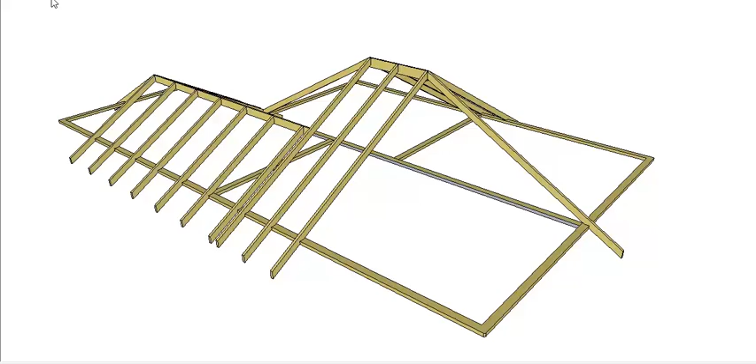So first step for the hip when we're scribing, grab the hip material. On this end I want to cut my plumb cut hip and my edge bevel hip. I'm going to cut them before I do anything else. Then I'm going to go back to my roof and work out what the stand-up height of our rafters is. That's the height that's left from the back of the top of the bird's mouth plumb up to the top of the rafter.

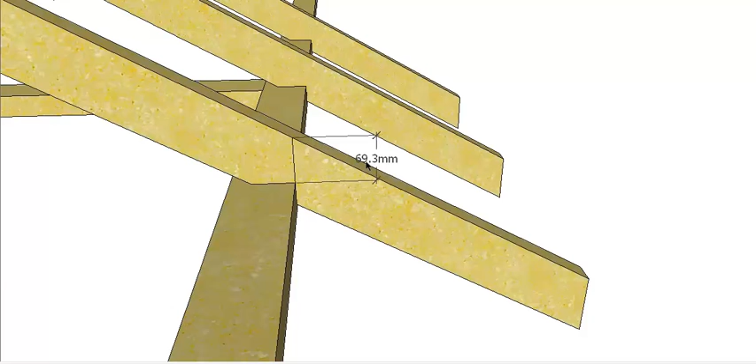So this distance here, the stand-up distance, in this case is 69.3 millimeters. Unless you've got a really sharp pencil and a good eye, you're not going to get the 0.3 of a mil, but we can work with 69 millimeters for our stand-up. Remembering that's on the plumb angle as well.

So we come back down to our hip material, and on the plumb cut hip I'm going to measure up that 69.3 mil and put a mark. It doesn't need to be too long, only need the mark right at the end, but at the top of the hip we measure up from the bottom.

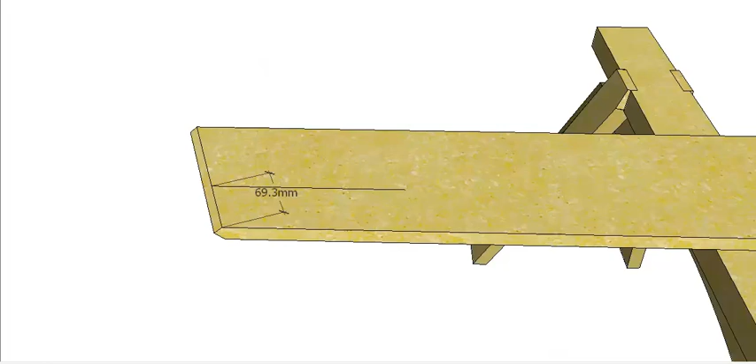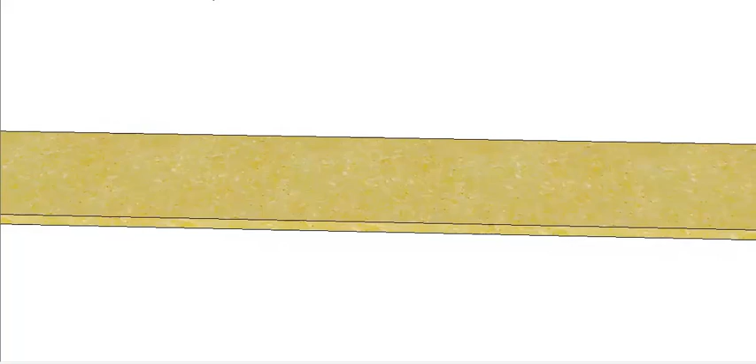Then we go down to a position which is roughly where our bird's mouth is going to be, and we're going to mark down from the top on the plumb angle the same distance, 69.3 mil. And we're just going to draw a parallel line along there, because we don't know exactly where the bird's mouth is going to be. So just remember that at the top of the hip we measure up from the bottom, and at the bottom of the hip we measure down from the top.

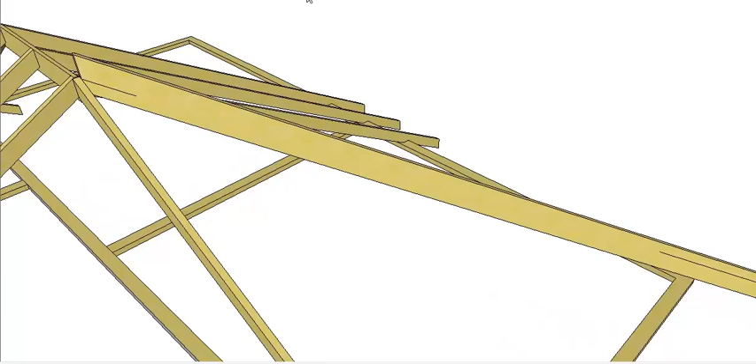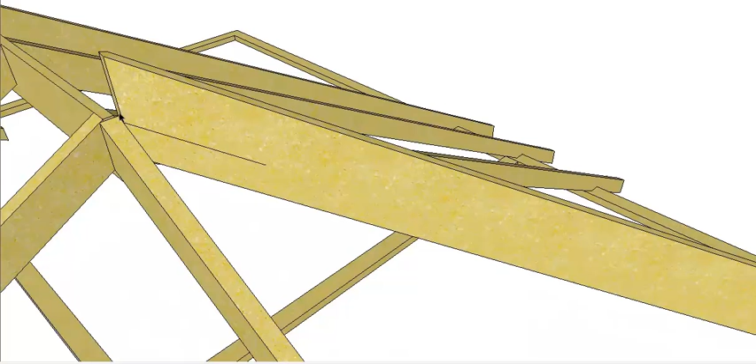Once we've got this parallel line in, we can then put our hip in place, roughly. We're going to set it up so that the line we just marked lines up with the edge of the crown end rafter on this side, and if you put the mark on the other side it'll line up with the top of the common rafter. And down the bottom you're just going to sit it where it would sit.

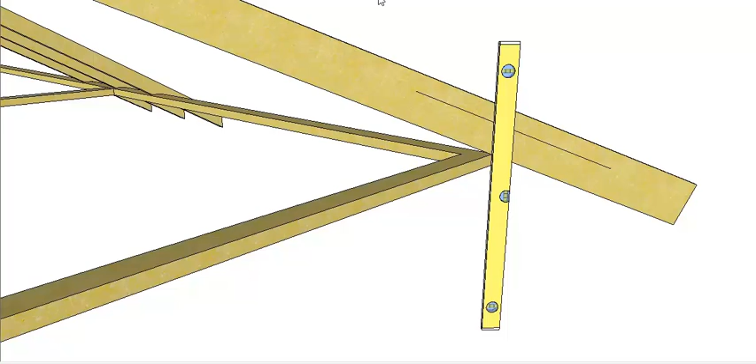Now whether you've cut your corner off or not, it doesn't really matter, but in this case I've cut my corner off, and we're going to mark a line plumb up from the outside of our plate. So there you go, plumb that line up, put in a mark, and then you can take the hip back to the saw stools.

So this is the back of our bird's mouth, that's the plumb bevel hip, and we need the level bevel hip, which is always at 90 degrees, so we can use a square to get 90 degrees, mark that in place, and we can cut out our bird's mouth.

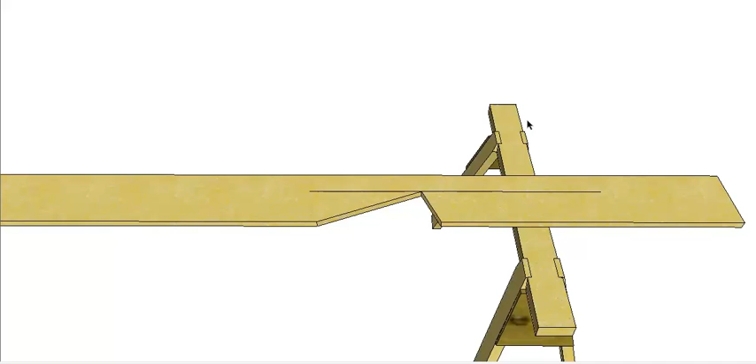You will then need to work out what your overhang is and cut that off, and also a lot of the time with a hip we need to reduce the width so that it doesn't interfere with our eave, so you can do that while you're here, and then we can put the hip in place. So that distance that was standing up above the roof has now dropped down, because this has dropped down into the bird's mouth.

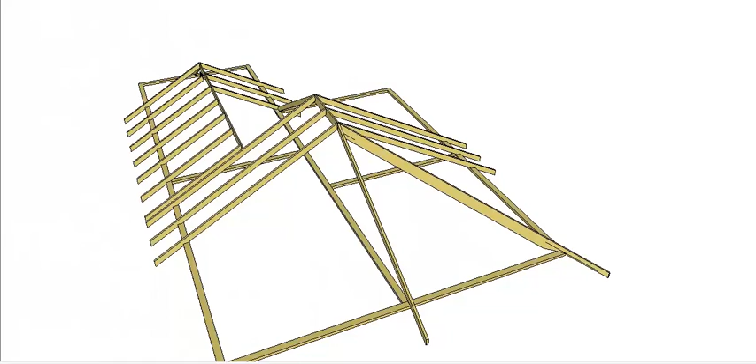So once I have that hip cut, I would take it around and test other locations to see if it fits. If it does fit, great, we can use it as a pattern. If it doesn't, you can repeat the method for all the other hips. Alright, so there we go. There we've cut a hip in using the scribing method.